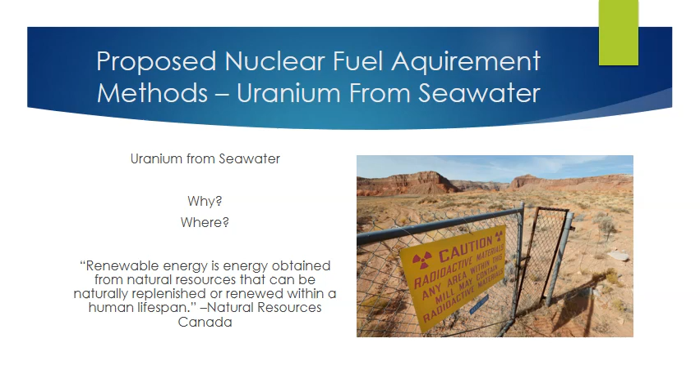Natural Resources Canada says renewable energy is energy obtained from natural resources that can be naturally replenished or renewed within a human lifespan. This is exactly what we will be discussing. Terrestrial uranium is the uranium that we currently mine from the Earth's surface. Above water, that is. As a mined resource, we are very limited in the amount of uranium that we can obtain. At our current demand, which we will discuss in greater depth, we have only enough terrestrial uranium to last another 100 years.

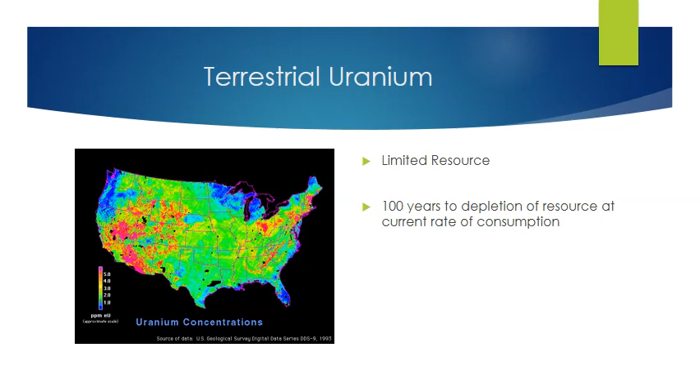In seawater, there is a pseudo-steady state chemical balance that exists between the rocks and the water. This is true of all rocks and water on land. Uranium is constantly leached from the riverbeds and carried into the oceans. This balance of uranium concentration in the seawater is about 3.3 parts per billion. The concentration is not pure uranium, but rather uranium dioxide. Then, when uranium is extracted, the seawater leaches uranium from the rocks to replace it.

The uranium dioxide, when in the presence of oxygen, will actually oxidize to form triuranium octoxide, or what we generally know as yellow cake. The 3.3 parts per billion concentration of uranium dioxide in seawater means that after we apply this to the ocean volume of roughly 350 million trillion gallons, we can calculate that there is at all times a value of 4.5 billion tons of uranium available. When we apply this with the concentration of uranium in the rock, we can calculate that there is still 100 trillion tons of uranium available.

Just the uranium currently in the seawater is enough to power 1,000 megawatt reactors for 100,000 years. At this volume, we would never be able to lower the concentration of uranium in the seawater over the next 1 billion years, even if 100% of all power generated across the globe was nuclear.

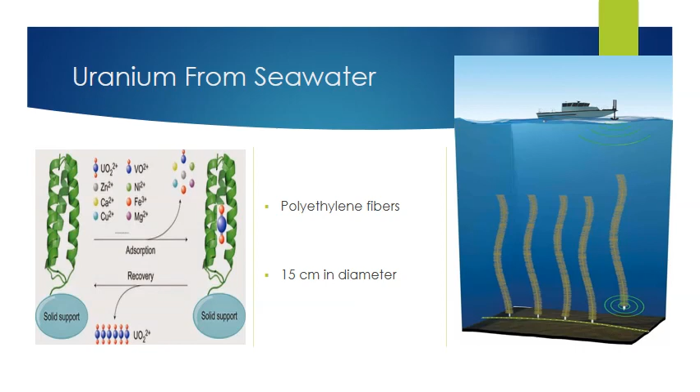Currently, there is considerable research being done, as mentioned earlier, on the extraction of uranium from seawater, most significantly by Japan, China, and the United States. The most recent technologies to emerge from the Department of Energy, the Pacific Northwest and Oak Ridge National Laboratories, use polyethylene fibers coated with amidoxime. These fiber braids are about 15 centimeters in diameter and can be several meters in length.

Amidoxime is an organic compound derived from hydroxylamine and is used as a reducing agent. The amidoxime is used to attract the uranium dioxide to the fibers and allow them to bind tightly to the fiber surface. Each of these fibers can bind approximately 6 grams of uranium dioxide per every 1 kilogram of fiber submerged, and this can be done for up to 50 days. Then the fibers must be pulled to the surface where they must undergo an acid treatment to break down the aminos in the amidoxime to recover their uranium dioxide, which also then allows the fiber to regenerate for future use.

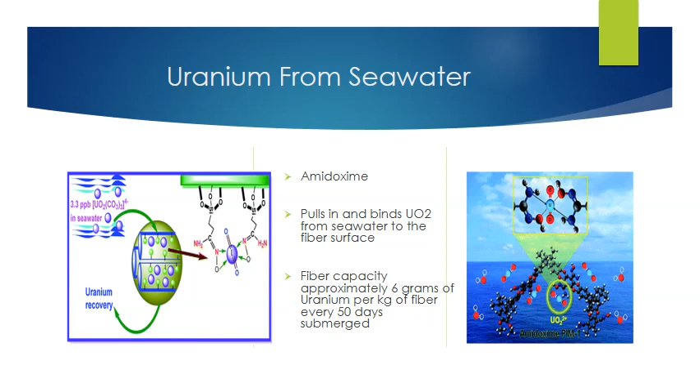Currently, the implementation of this method costs about $200 per pound of triuranium octoxide, which is about double the current commercial mining cost. From 2011 to 2016, the Pacific Northwest and Oak Ridge National Laboratories were able to reduce costs by a factor of 4. As of late 2018, experiments have begun with an acrylic yarn coated in amidoxime. This base substitution is intended to further reduce the costs, but empirical data is not yet available to its success

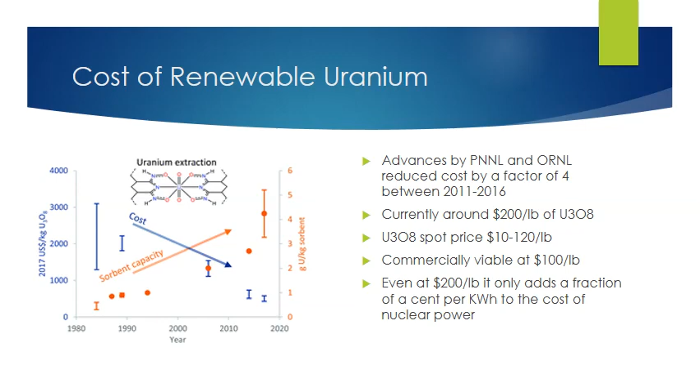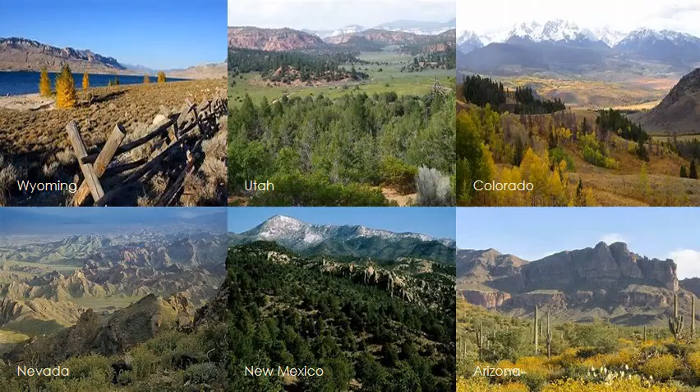or not. With the fluctuation of the triuranium octoxide spot price from $10 to $120 over the past decade, this technology needs to be reduced to below $100 per pound to be considered a commercially viable replacement. Extraction of uranium from seawater can not only be the key to making nuclear energy renewable, but will certainly help protect the environment from contaminating areas like this and keep them looking like this.

Now that we have discussed a more renewable way to acquire our nuclear fuel, we are going to discuss what we do with our fuel and how we propose to utilize it. As discussed earlier by Josh, a thermal reactor is basically a nuclear reactor in which nuclear fissions are caused by neutrons that are slowed down by a moderator. A light water reactor is just a thermal reactor which utilizes normal water, as opposed to heavy water, to act as both coolant and neutron moderator, which comprises the majority of reactors in the United States.

As of August of 2018, there are currently 60 commercially operating nuclear power plants with 98 nuclear reactors across 30 states that generate an amazing 20% of power. About 27 tons of fresh fuel is required each year by every 1,000 megawatt nuclear reactor. Given this, we can crunch some numbers and figure out that we require about 208,000 kilograms, or 208 metric tons, of natural uranium for every 1,000 megawatt reactor.

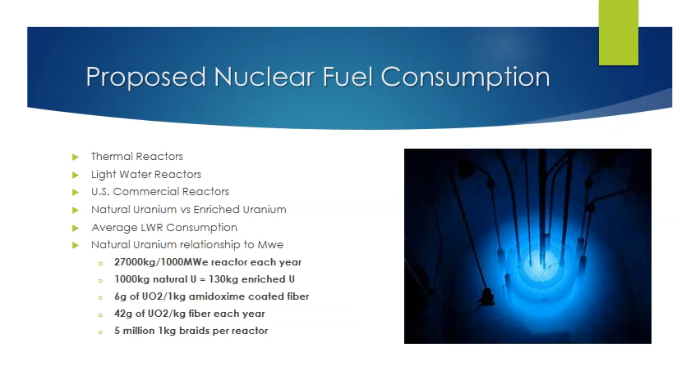In a nuclear reactor, the nuclear fuel used is required to have a much greater concentration of the uranium-235 isotope than is normally found in natural uranium. Uranium-235, when concentrated or enriched, is fissionable in light water reactors. Commercially, the uranium-235 isotope is enriched from 0.7% concentration to a concentration of 3 to 5%, and only then can be further processed into fuel.

The enrichment process involves using our supply of uranium oxide and converting it to uranium hexafluoride, first because fluorine has only one naturally occurring isotope, thus does not contribute to weight differences in the separation process. And second, because it exists as a gas at the needed low operating temperatures at a separate conversion plant.

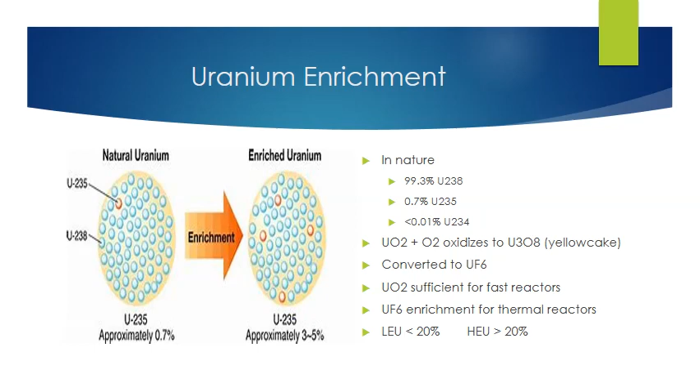Depleted uranium is what is left over when most of the highly radioactive isotopes of uranium are removed for use as nuclear fuel. Depleted uranium is a heavy metal that has chemically toxic properties and is slightly radioactive. A common misconception is that radiation is depleted uranium's primary hazard. However, depleted uranium is approximately 40% less radioactive than naturally occurring uranium.

Depleted uranium does emit alpha and beta particles as well as gamma rays. This does not pose much of a health risk though, as the alpha and beta particles are blocked by the skin and clothing. The gammas are such low energy they also pose minimal risk. Until now, the uses for depleted uranium have primarily been only of military use in ordnance and armor due to its high density.

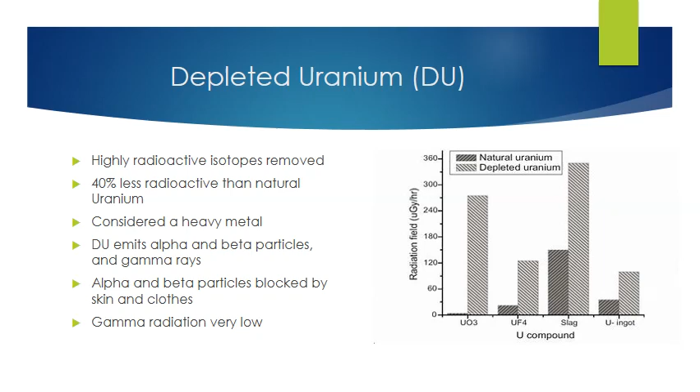Now we have discussed the reactors that burn the enriched uranium and why the enrichment is necessary and how. We have also discussed the byproduct of that enrichment process, depleted uranium. The next component of this puzzle is the proposed means of fuel consumption, and that is the use of fast reactors. The major difference between thermal reactors and fast reactors is the extent to which they can burn uranium.

We have discussed the low concentration of the isotope uranium-235 in natural uranium that requires enrichment by thermal reactors, which are then able to convert only minimal portions of the uranium-238 to plutonium-239 before their neutron availability becomes too low. As a result, light water reactors are able only to fission about 0.7% of all uranium that is mined.

Fast reactors, however, are able to convert uranium-238 to fissile plutonium-239 or fission the uranium-238 directly. Additionally, they carry an added benefit of being able to create significantly more fissile material than is used. Thus, fast reactors are able to fission practically all uranium as it is mined. Even if fission products are never chemically removed from the reactor, they can still fission up to 50% of the material.

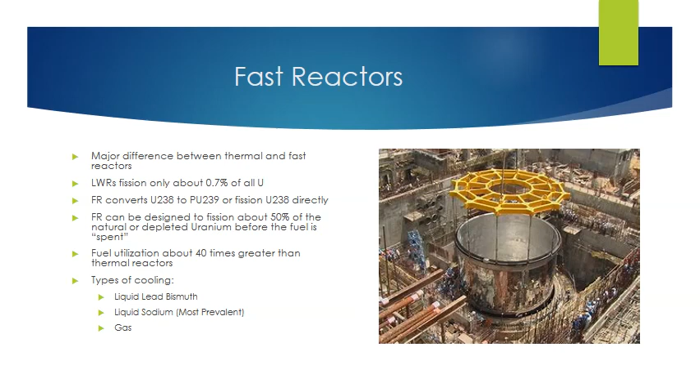Another of the major differences between thermal light water reactors and fast reactors is the coolant. Light water reactors use regular water as a coolant, where the fast reactors utilize more exotic coolants such as a liquid lead bismuth alloy, a liquid sodium or chloride, which is currently the most prevalent, and gas coolants, primarily helium.

The proposal then is that we will use the current waste as fuel for the fast reactors. As you can see, there are two graphs comparing the radiotoxicity of the spent fuel and their half-lives. On the left is the graph of our current waste materials. Note that fission products decay below natural uranium in approximately 500 years, and the actinides roughly 10 million.

The graph on the right is of the same components after being spent in a fast reactor, and the values and magnitudes are different, with the fission products dropping below that of uranium in about 50 years and the actinides 7,000 years. The fission products of uranium are mostly isotopes of iodine, cesium, strontium, xenon, and barium. The actinides are the long-lived particles having major impact on geologic repositories, such as plutonium, neptunium, curium, and americium. Notice also the starting energy levels of the fission products and the actinides are drastically lower.

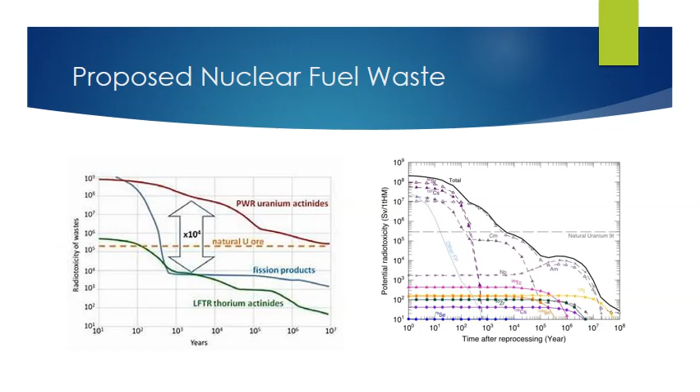The traveling wave reactor is the first of two fast reactors we will touch on to consume our current waste. Unlike light water reactors, traveling wave reactors are capable of utilizing depleted uranium. The core design gradually converts the fuel through the nuclear reaction and fuel shuffling. The traveling wave reactor is similar to other fast reactor designs, predominantly in that the coolant material is a liquid sodium.

This core also includes a special design where the breed-burn wave does not move through fixed core material. Instead, a standing wave of breeding and burning is established by periodically moving core material in and out of the breed-burn region. This movement of fuel assemblies is referred to as fuel shuffling. This fuel shuffling operation is expected to take 1 to 2 weeks, depending on the number of fuel assemblies requiring shuffling.

Fuel shuffling accomplishes three important functions. First, it provides a means of controlling the power distribution. Second, it manages the excess reactivity without the control rods. Third, it greatly extends the life of the reactor core, because core life is largely determined by the number of depleted uranium assemblies available for shuffling. Fuel shuffling does not involve opening the reactor because all shuffling operations are conducted with equipment installed in the reactor vessel, and it occurs at about the same interval for the life of the core.

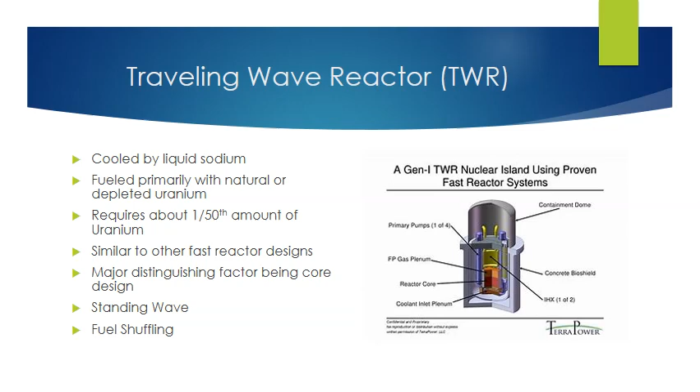The final of our two fast reactors is the molten salt reactor. In a molten salt reactor, the uranium floats in a stabilizing bath of melted fluoride or chloride salt. As the fission process begins, the temperature slowly increases to 1300 degrees Fahrenheit. Tubes on the side of the core carry the heat to a heat exchanger where intermediate pipes carry heat to another so the energy can be transferred to the energy conversion system free of radioactivity.

One of the major attributes of the molten salt reactor is the liquid fuel, because it can be processed during operation. This means that fission products can be removed from the core quickly before absorbing the neutrons, allowing for a much higher fuel efficiency than traditional reactors. Also, this means that when thorium absorbs a neutron and becomes protactinium, the protactinium can be removed immediately and allowed to decay into uranium-233 without the risk of a neutron loss.

The greatest of the molten salt reactor risks is the production of tritium. When lithium is used in the salt for process stabilization, then tritium will be produced. A special sodium fluoroborate is used to capture most of it, though some may still escape.

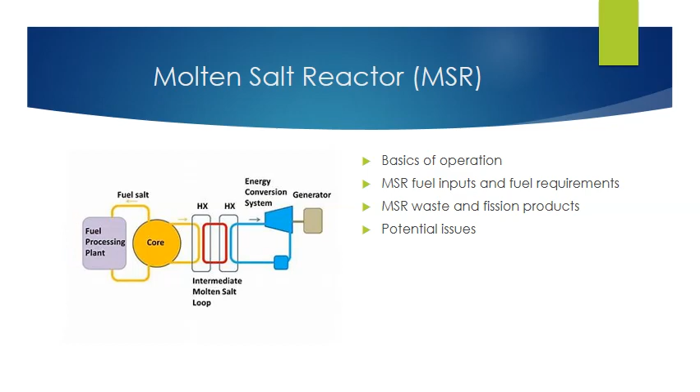Well, everyone, that wraps up the presentation. So, a real quick review before I turn things back over to John. We covered today the extraction of uranium from seawater, the basics of thermal reactors and light water reactors, uranium enrichment, depleted uranium, basics of fast reactors, nuclear waste, traveling wave reactor basics, and molten salt reactor basics.